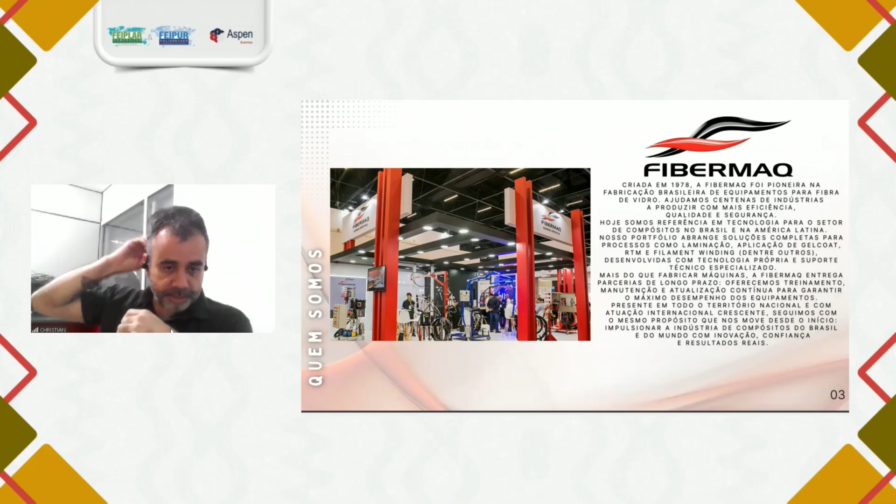Okay, as I said, we were founded in 1978, and we also manufacture equipment for polyurethane, for spray, injected, or pre-molded applications.

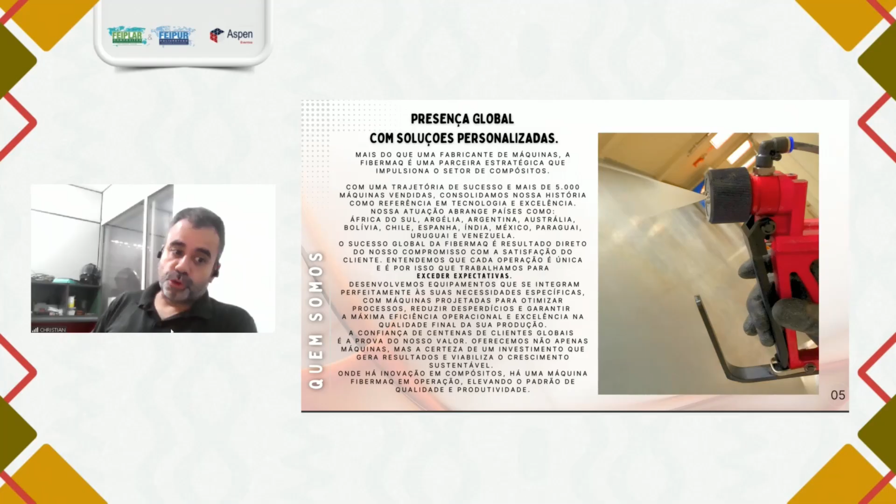We are present, I believe, in all the continents: Europe, Africa, Pacific. And well, I would like to introduce our new line of equipment for the application of F1, for gel coat, spray up, and RTM. So, what is our differential?

We are fit to the Brazilian market. We know labor sometimes is hard to find, and company structure sometimes is not the best. Our objective is producing a simple and functional equipment of easy maintenance, so you don't need anything special or any skilled labor for maintenance. We simplify as much as possible, avoiding any complication, because we know that sometimes companies produce guns and pumps that are too complicated, and then we get to the plant and it is stuck there due to a lack of labor.

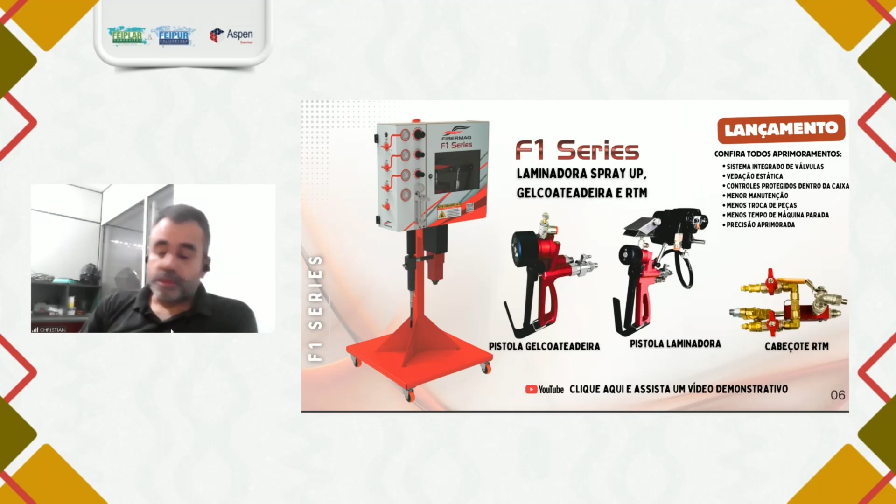It is within a box, which is very nice. You don't have any mobile part exposed, so you cannot put your hand on a pump that is working and get your finger stuck there and get hurt. The equipment there is protected.

We know that spray up and gel coaters create a mist, and with a protected equipment, you protect the fundamental parts of the machine. They are not accessible, so there's no accumulation of dirt. It is enclosed, but with easy visualization and easy control. It is an equipment that is robust and simple.

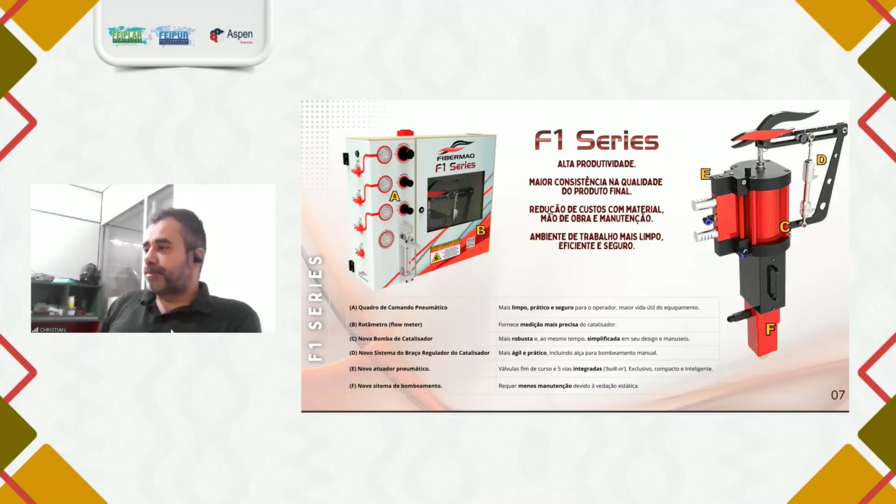Some advantages of this line, as you can see, it's very small, very simple, not many parts, which is our objective. Another line is Evolution, similar but a little older, more traditional in Brazil. This may be the most common equipment in Brazil, and as we have had leadership for many years already, almost 5 decades, with gel coater, laminator, and RTM.

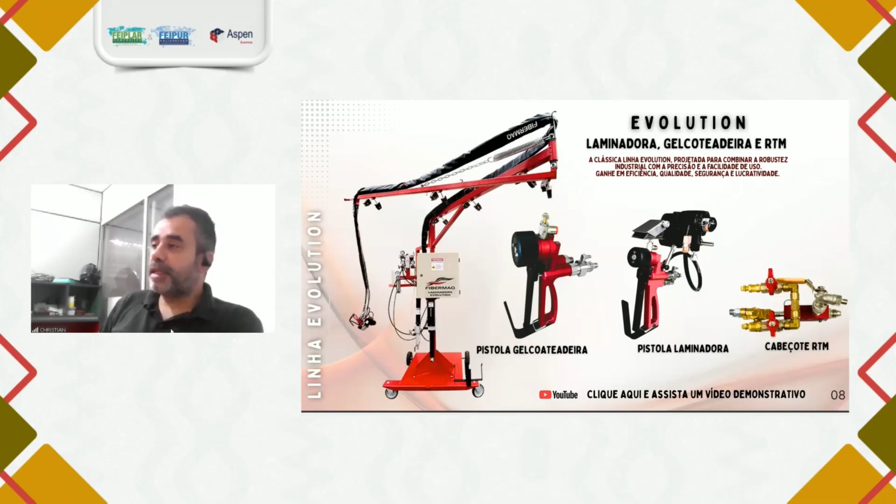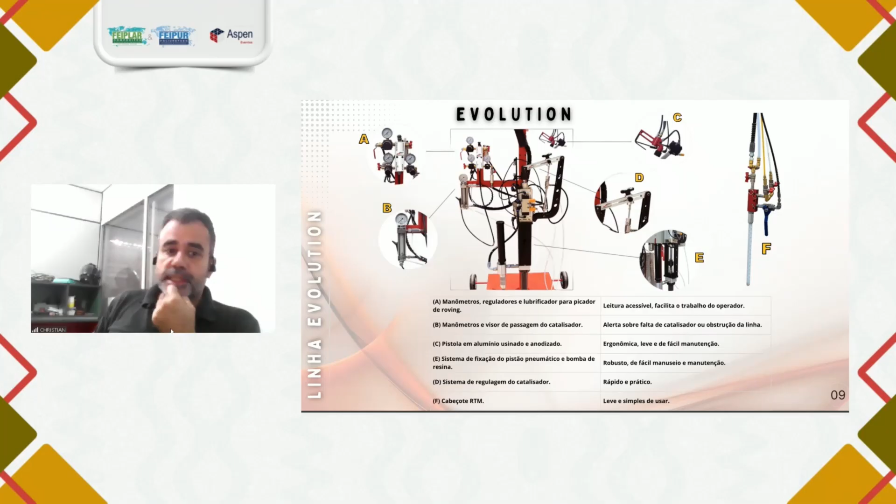Here are some characteristics of the machine. This material is also available in English and Spanish. If you need it, just ask and we can send you this manual.

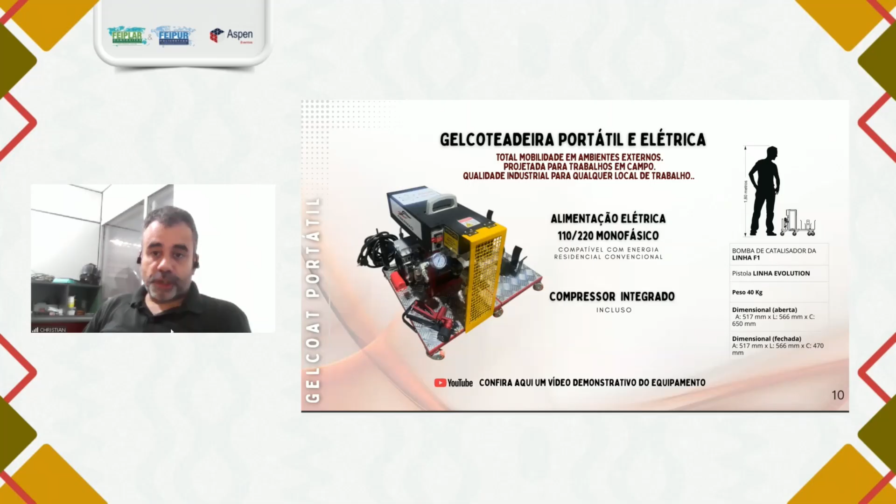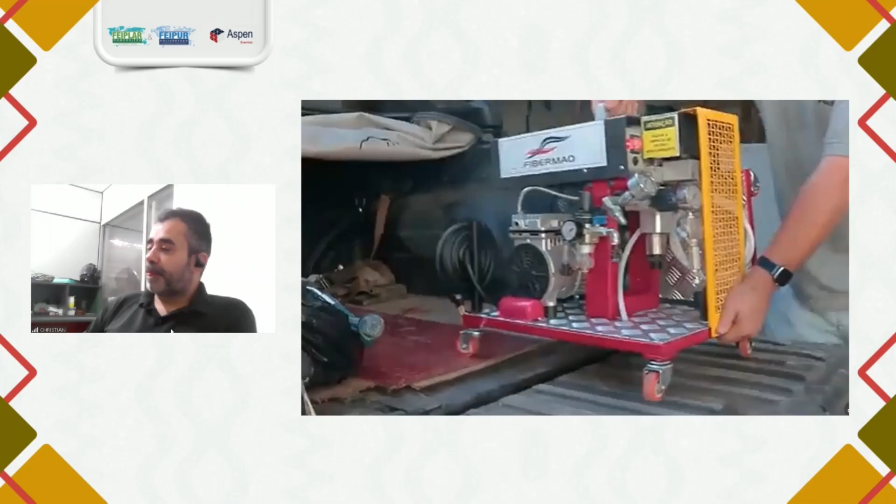This is a very interesting product. It's something new. Actually, we launched it last February. This is a gel coater. Let me show you a video. See the footprint - it's just 40 kilograms, and it can be taken in any car.

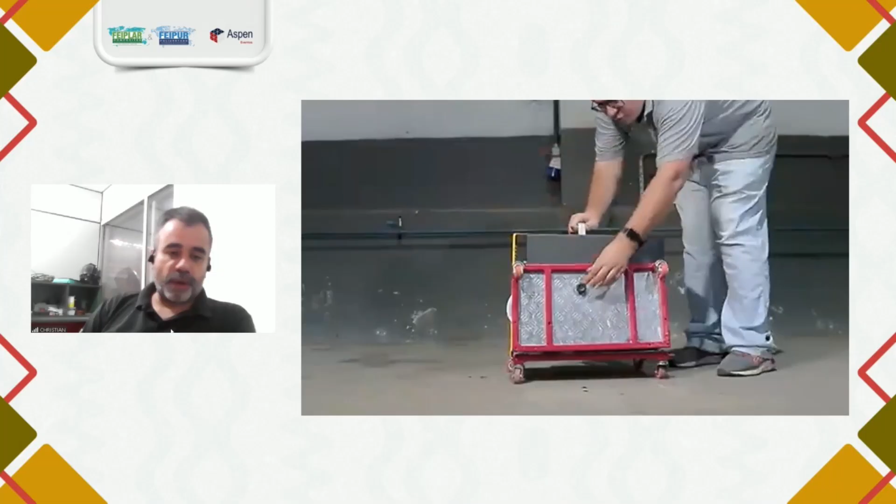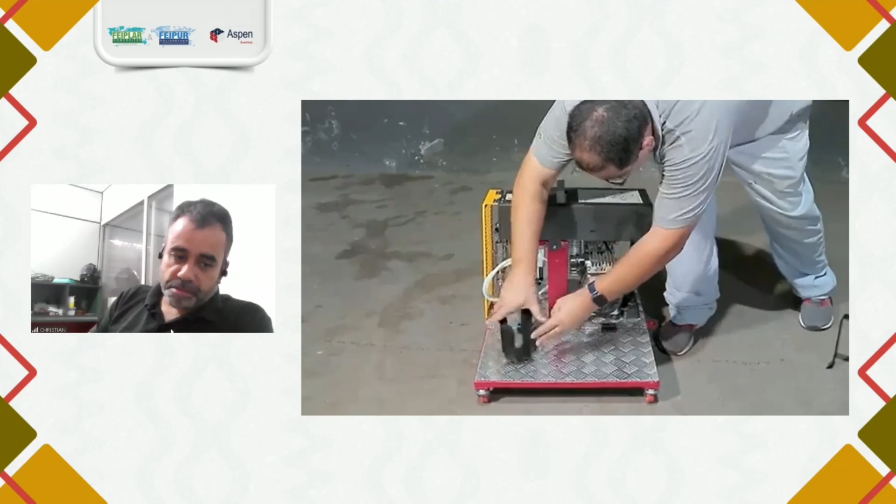In the smaller trunk of the smallest car, it fits. It's electric and mono, so it works at 220 volts in any company or even for domestic use. It's almost a domestic use equipment.

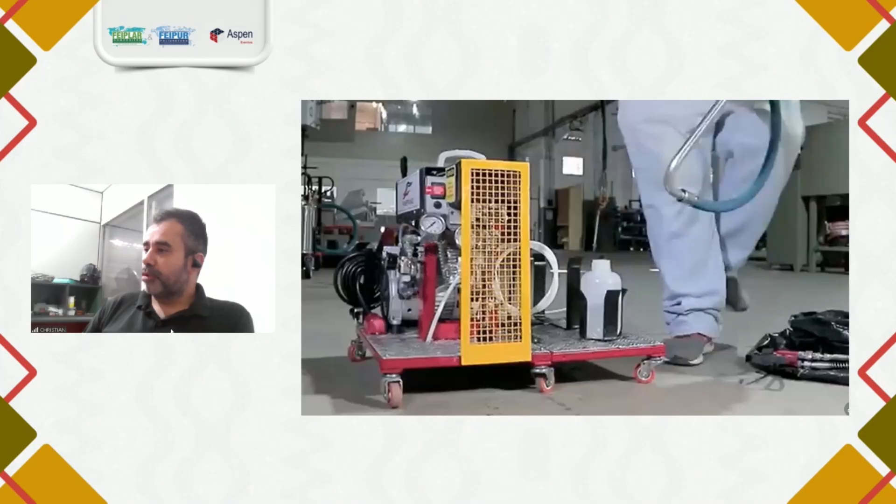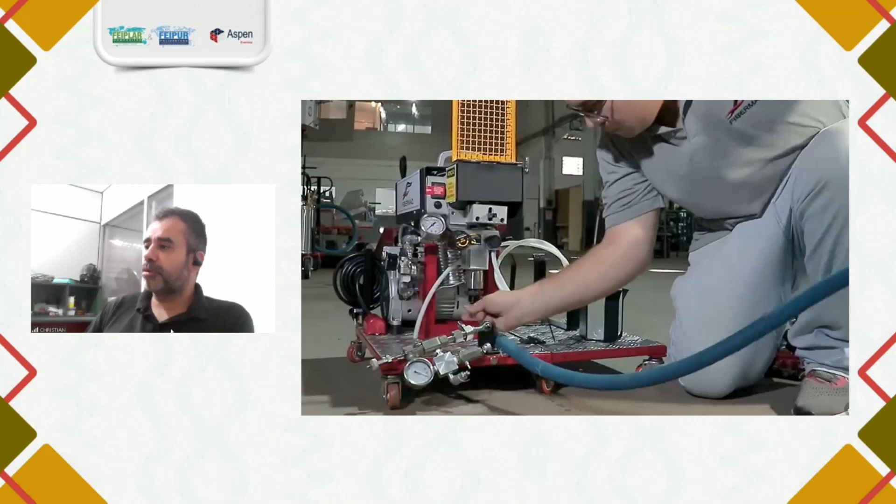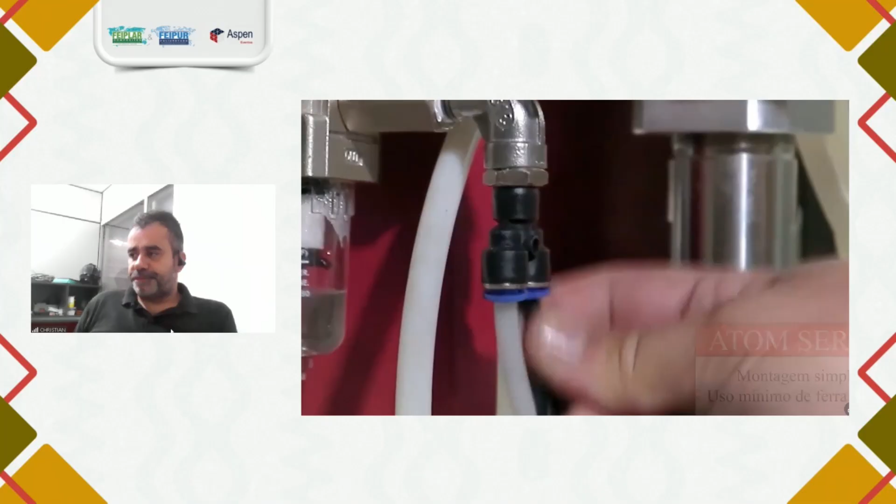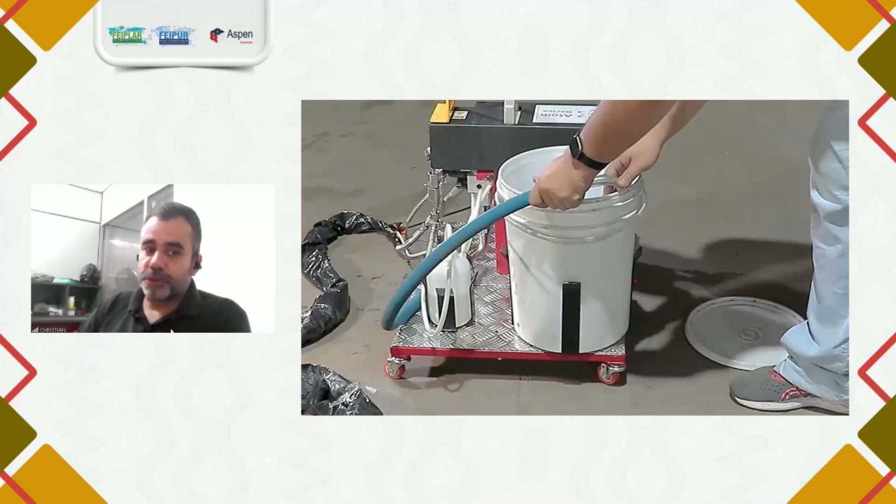Here we assemble the tanks, or the tank support, for the gel coat. This is the pump. Here we are adjusting the percentage we want, 1.5, 2, 3, 3.5. Here I'm connecting the hose, which is the one that will lead the gel to the vessel. It's a fast connection. So, a very compact equipment, easy to take anywhere, easy to use. With just a wrench, it is enough to assemble and disassemble - not for using it, but for maintenance, a simple wrench is all you need.

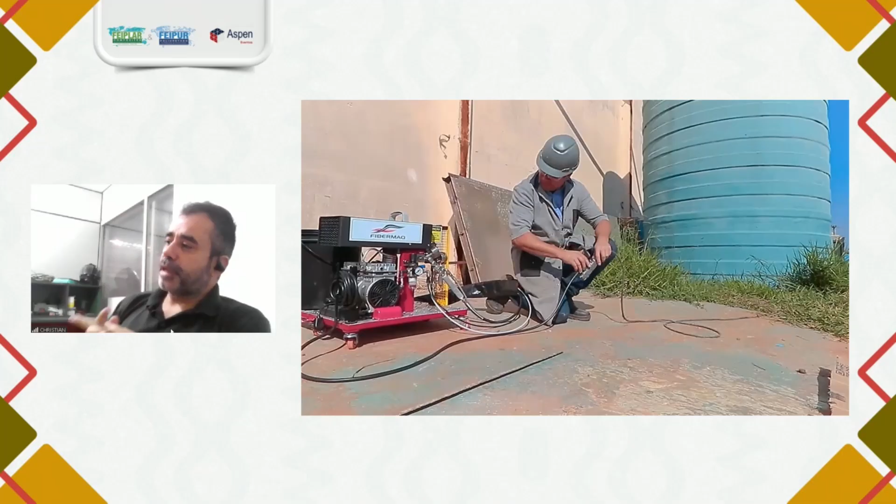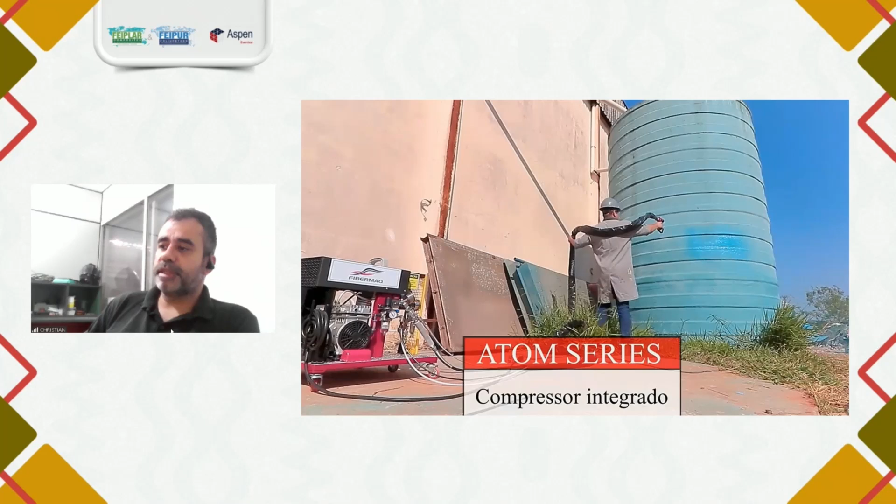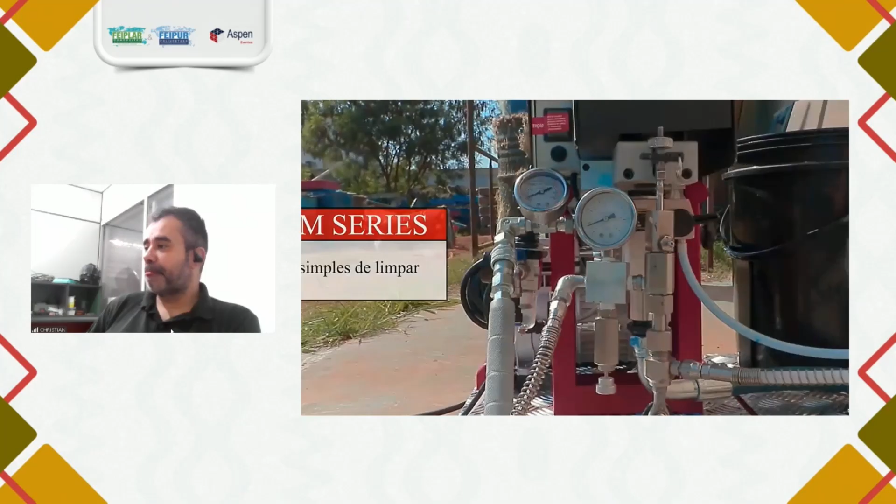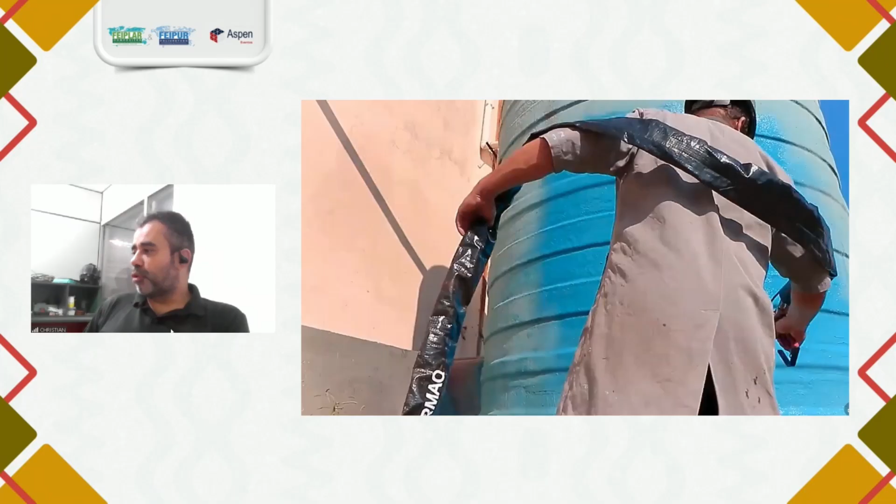And here we see the operation. The pump is electrical, but we need to have compressed air in the gun, so there is a compressor that is fully integrated, with outputs for connections here. You may connect other items on the machine as well. So the MEK pump is working as well, and that's quite professional work. We are talking about a small-sized machine, but the results are quite professional, as you can see.

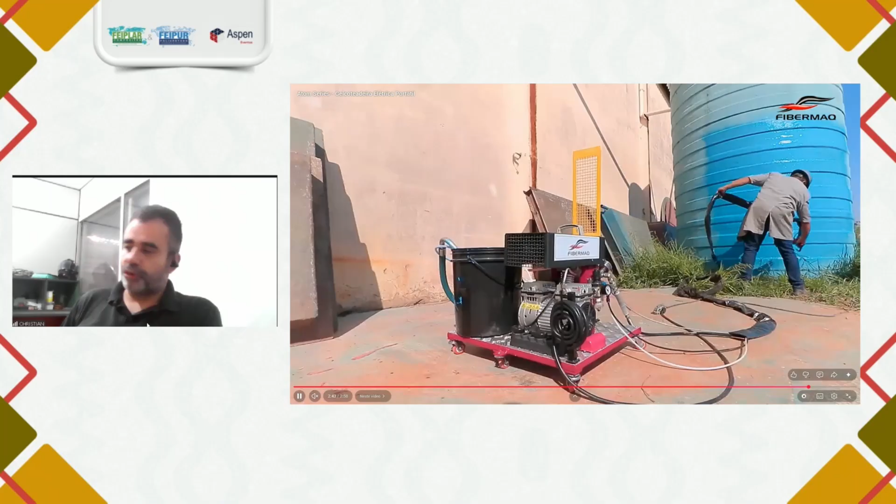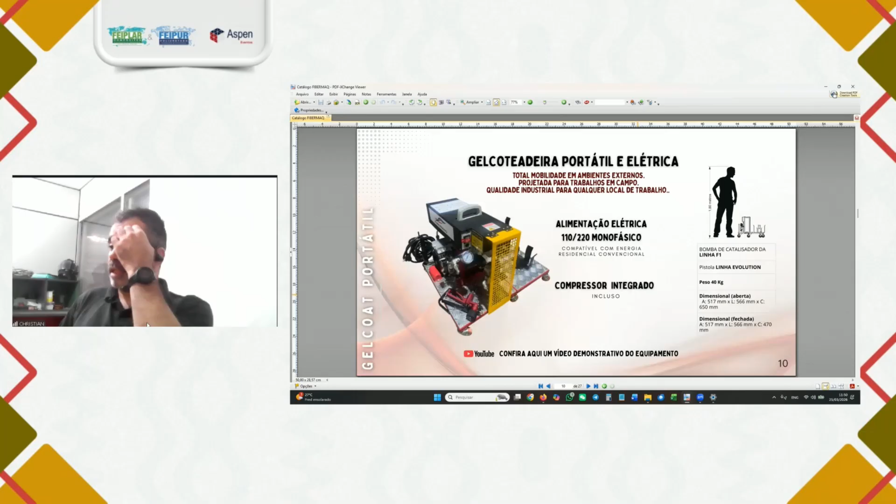High standards results, that's the gel coat painting. We should have a laminator soon that will follow the same design - not ready yet, but it should be ready by late this year. Very nice result, right? So we have the gel reservoir, the catalyst reservoir, and then we do the work, we produce the piece. That's the new equipment, 220 voltage, but it can be 110 as well.

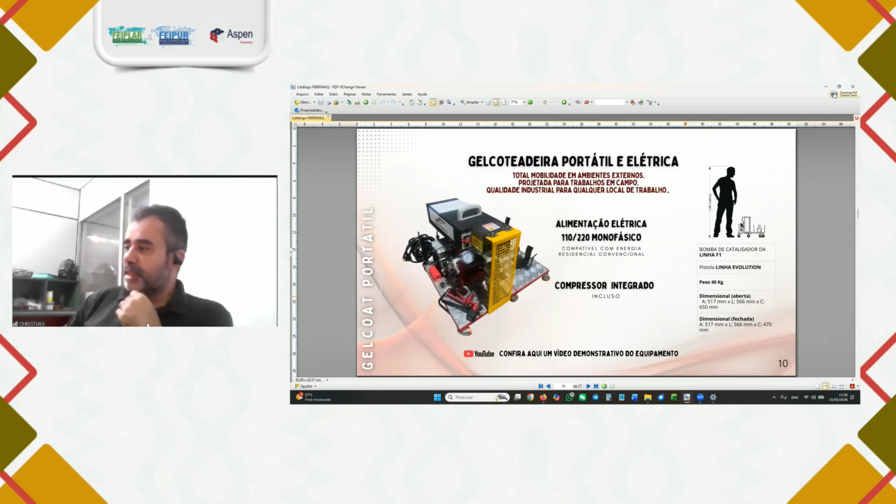So that's a person whose height is 1.8 meters, for reference. We have the measurements here. It's a quite compact device, as you can see. That's a whole different line that we provide.

That's the filament winding solution. In this case, we use it for tanks - they can be up to 15-meter tanks.

Could be even bigger, but it's because of transportation. We cannot produce anything bigger than 15 meters because then transportation may be a hindrance. Diameter-wise, small diameters from 1, 2 inches up to 4, 5, 6 meters in diameter.

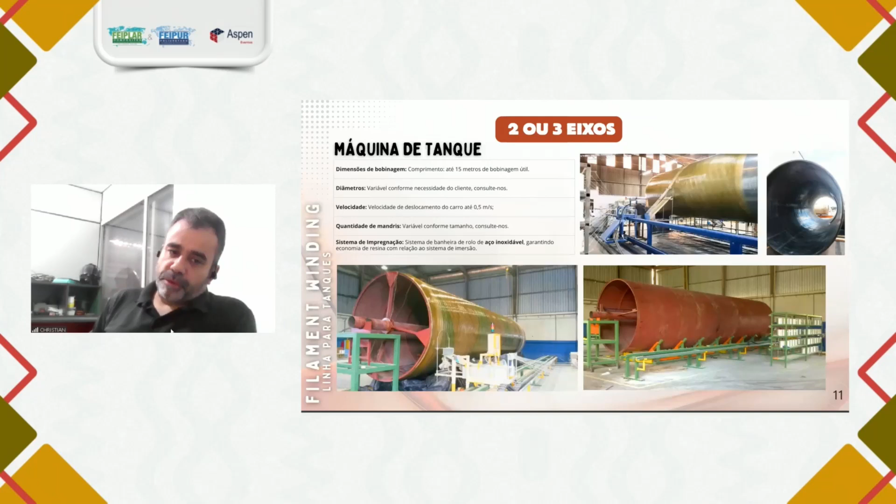So I took some examples of large pieces to show you here in this presentation. So that's the tank machine. Now here's the tube machine, the pipeline machine.

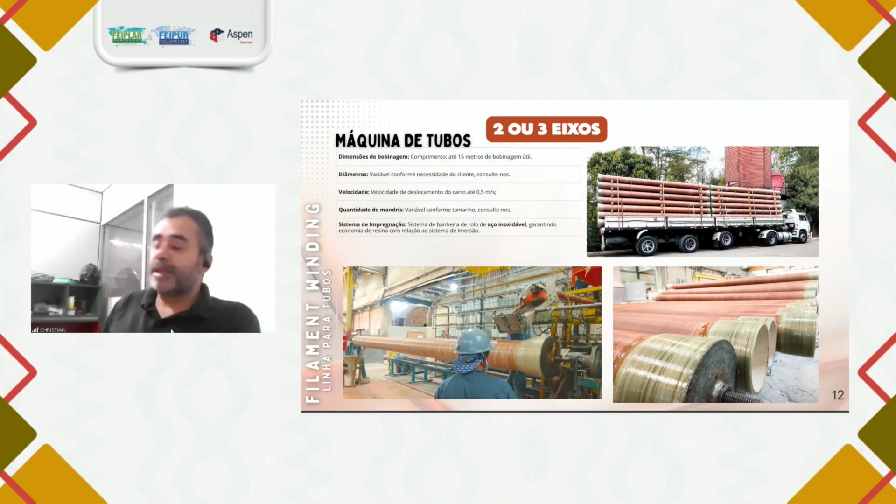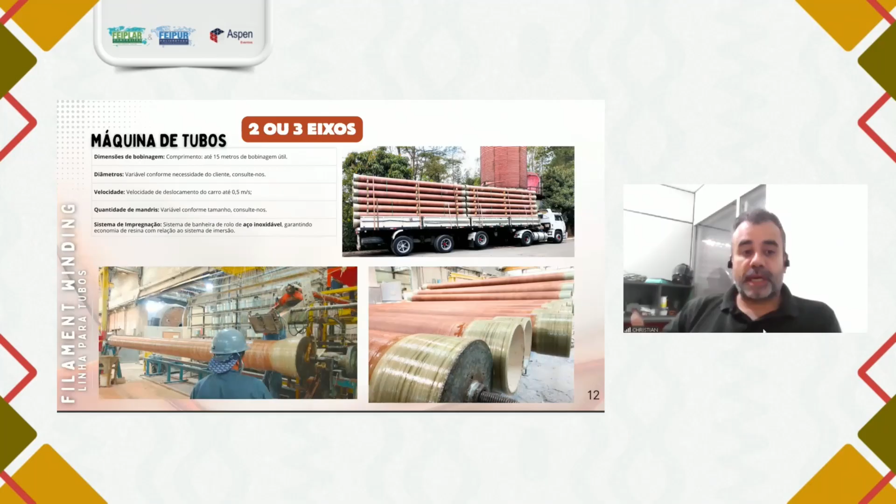From 2 to 3 axes, the standard machine goes up to 600 millimeters in diameter, okay? So you will not manage to work at 50 millimeters, 4-meter length, because then you're going to lose efficiency, so we don't do that. So that's the pipeline machine.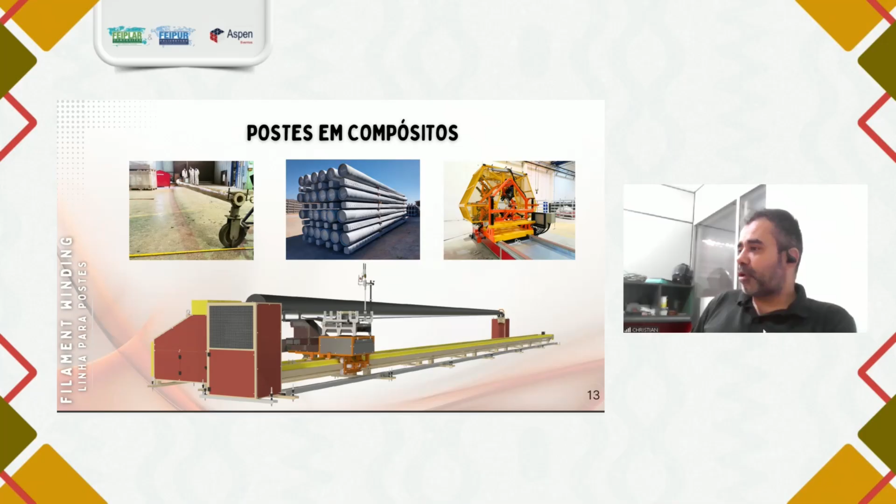Just like Rodrigo was telling us, we have the poles that are made of fiberglass. There are many advantages, and he was telling us about all of this - how light they are, their service life, there are many advantages.

Well, we go up to 15 meters in length, more or less, because even if we can produce longer than that, there is no transportation. 50 to 600 millimeters in diameter. If you need greater diameters, we can find a solution for you as well.

We work with 1 mandrel or 2. One mandrel here, and another one working with 2 mandrels at the same time for 2 poles at the same time, okay? If you have a double machine...

Production increases by 70% when we compare to a single lane machine. Well, you can do 2 at the same time, but when you have 2 chucks, you have the downtime - you unload and reload the machine, and the time taken is longer for the chuck, the mandrel. So if I use 50 threads per chuck, I work with 2 chucks.

So there might be a rupture of a thread. It's twice as high when we compare to a single chuck. And if there is a rupture in a thread, in a filament, we have to stop both lanes of the machine. So that's why we say the increased throughput is by 70%.

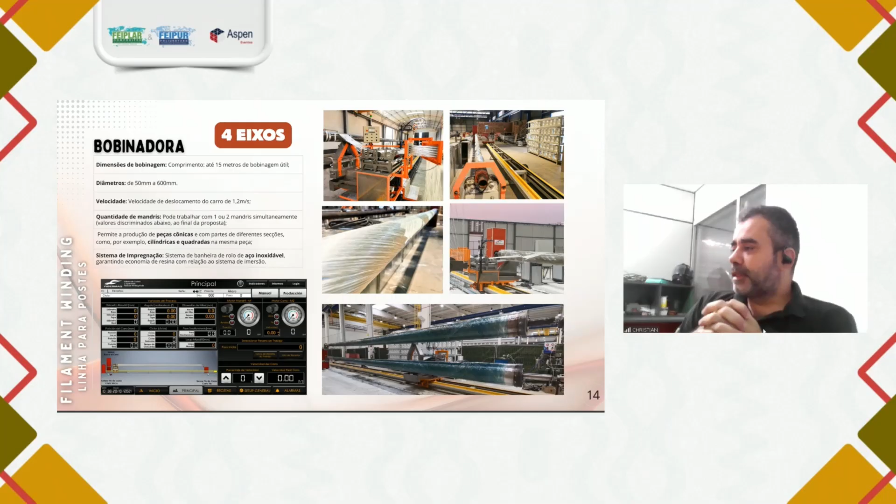So, when you work with a single chuck, a single lane, we recommend actually having 5 different chucks, because you follow a process. You are producing 1 piece, there are 2 pieces in the curing station, another piece that you are releasing from the mold, and then you are preparing a 5th one.

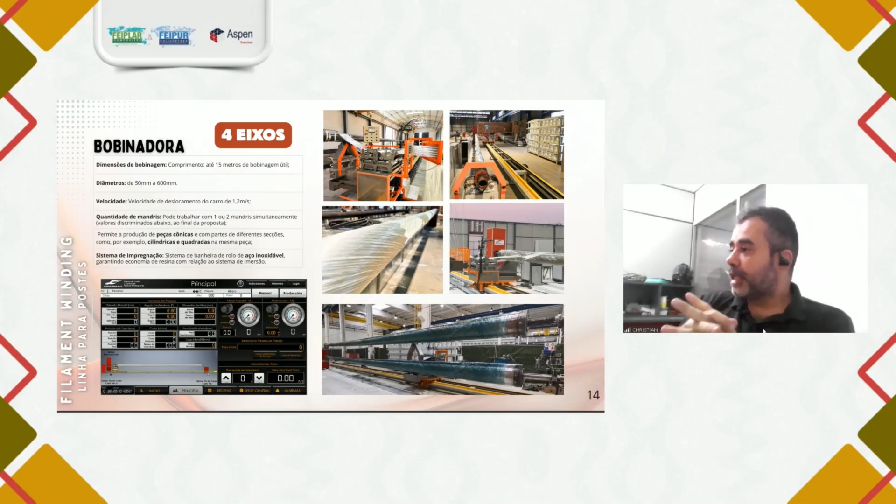So it's a continuous process. You never stop. You go from one stage to another. If you work with 2 chucks, perhaps it's not enough, and you need a higher number of curing stations.

So at least 8 - that's what we recommend, having 8 chucks. We recommend 5 chucks if you want a single production lane, and 8 to 10 chucks if you want to increase your production by 70%. So then you have 2 lanes, 2 production lines, okay?

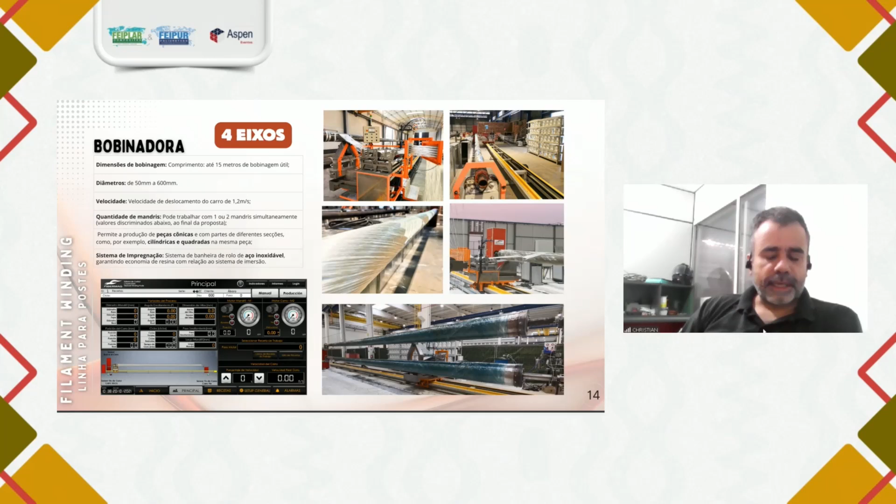Well, it depends on what you prefer. There are people who prefer working with a single chuck, people who want to work with 2 chucks. It depends on the processing speed of your company. They're both valid - I mean, single line or double line.

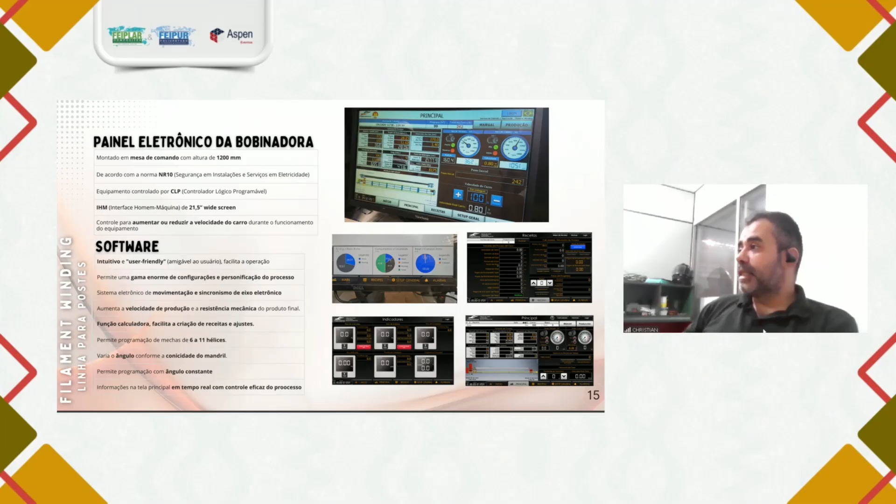That's the panel. I showed the image to you. Super easy to visualize the dashboard and see what's happening. I'm going to zoom in here. It's very much graphical and visual. As the machine moves, you see the movements.

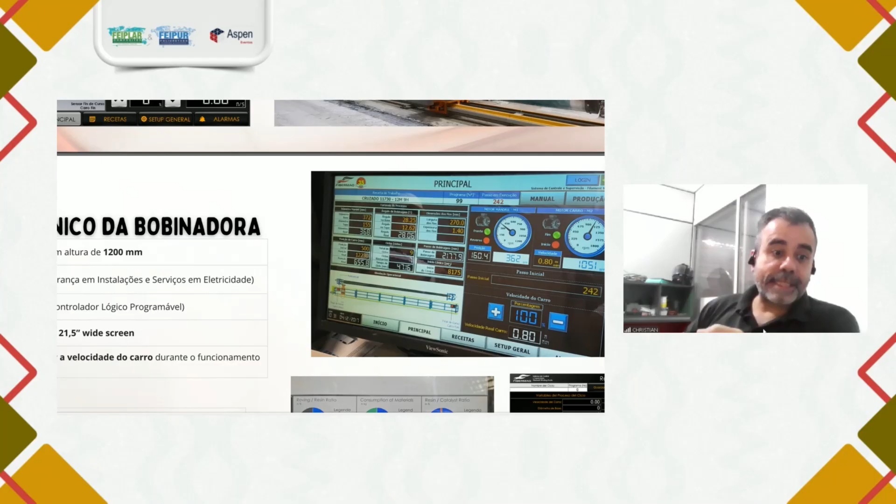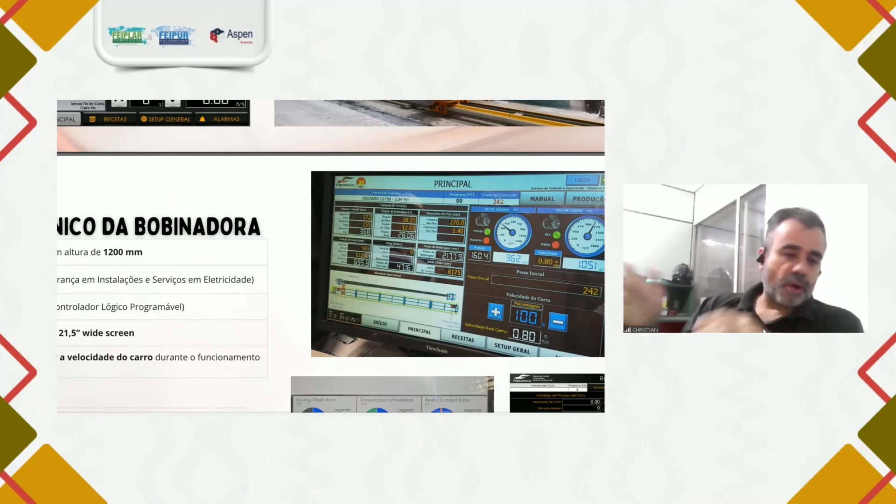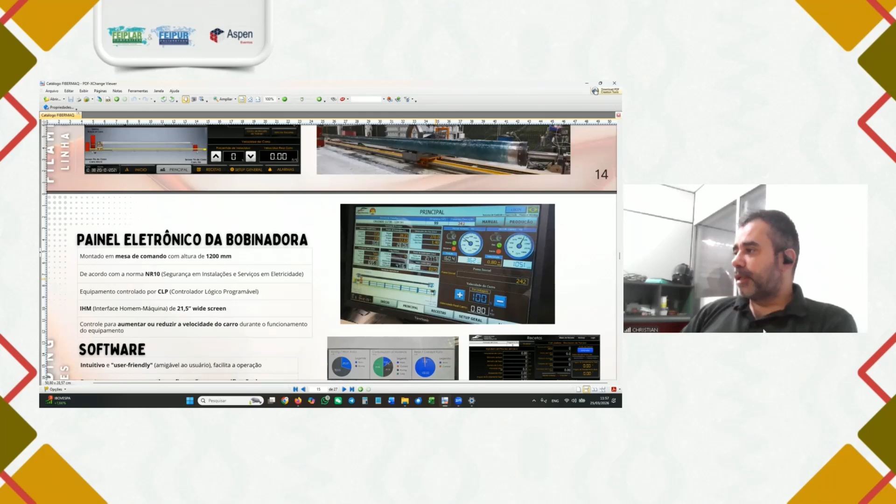Data in yellow, that's the recipe, the preset data for the production batch. So you go there, you introduce the data for the batch, let's say 5% deflection rate, and then you provide all of the measurements and the allowable deformation, and then you generate the steps of the process, and the system will execute all of the steps that you have programmed into the dashboard.

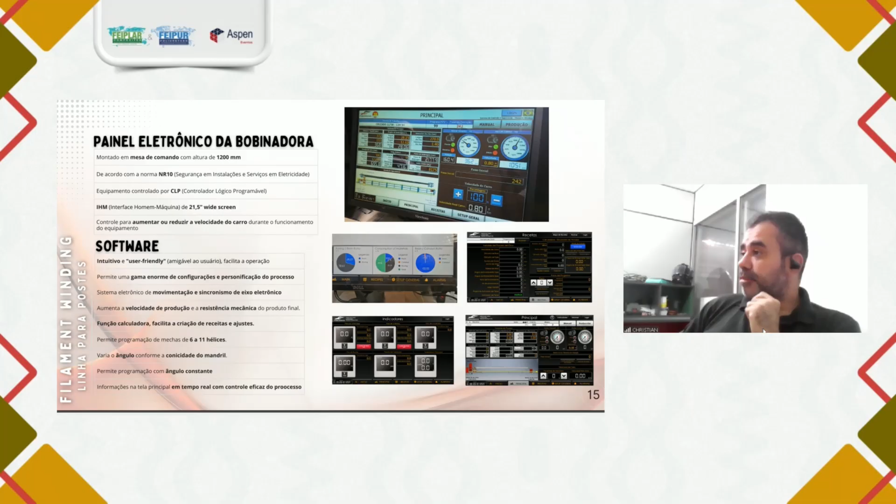It's quite simple. We want to avoid human error. Something that is quite interesting, and Rodrigo was talking about automation.

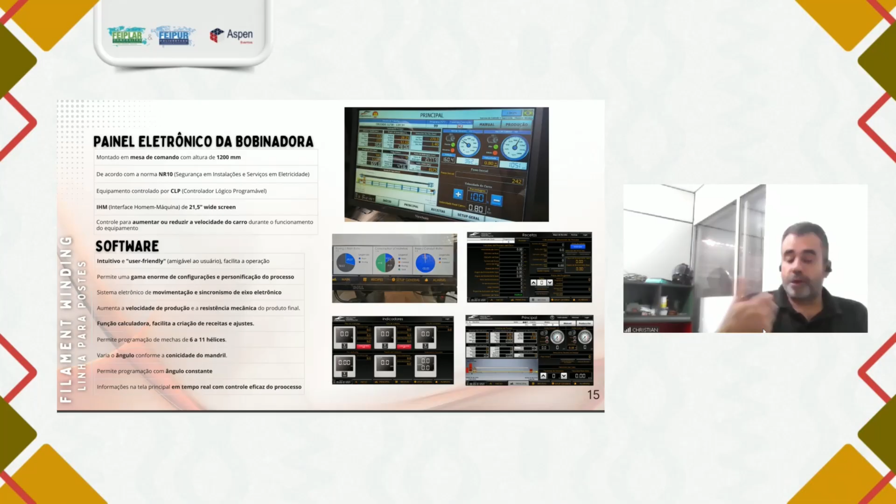Yeah, we have the scales, and the scales are connected to the CLP. So whenever a pole is being produced, there is a report that is issued - start time, end time, operator in charge, percentage of fiber, percentage of resin, and the percentage of catalyst. That's what you see on this screen here. So these are the images of a certain screen.

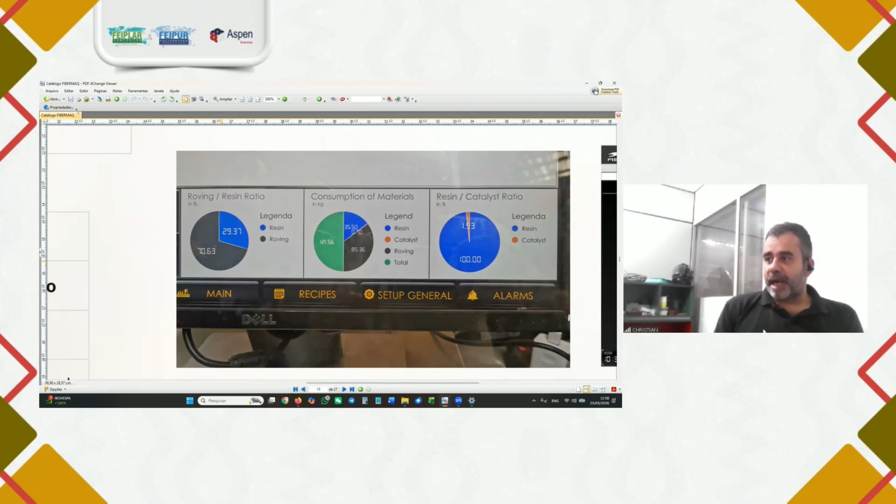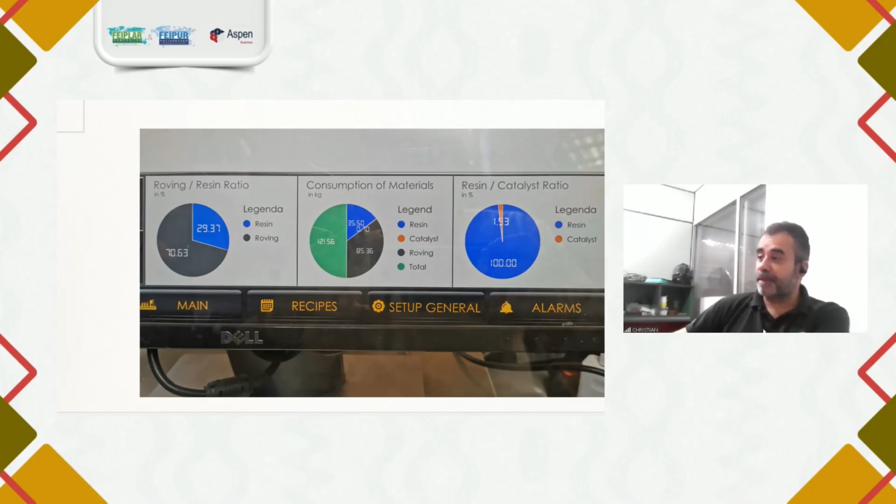So we were able to exceed expectations, actually producing with more than 70% fiber. Acceptable levels in daily production should be about 65-35 up to 70-30. 70-30 is quite difficult to attain, and it can look dry, but it's considered ideal.

We have the formulations, the indicator screen. It's a dashboard that's quite easy to use, and we want to avoid operational errors. You can do the programming on the machine itself, so you do the scheduling, the programming, and then you just call them up. You have the pre-formulations set, you select them, okay? Tech package.

I didn't talk about the scale, the weight measurement. In this case, you register the initial weight of the fiber, catalyst, and resin, and then you compare with the final result. So it compares, and then you have the exact weight of each component in the end.

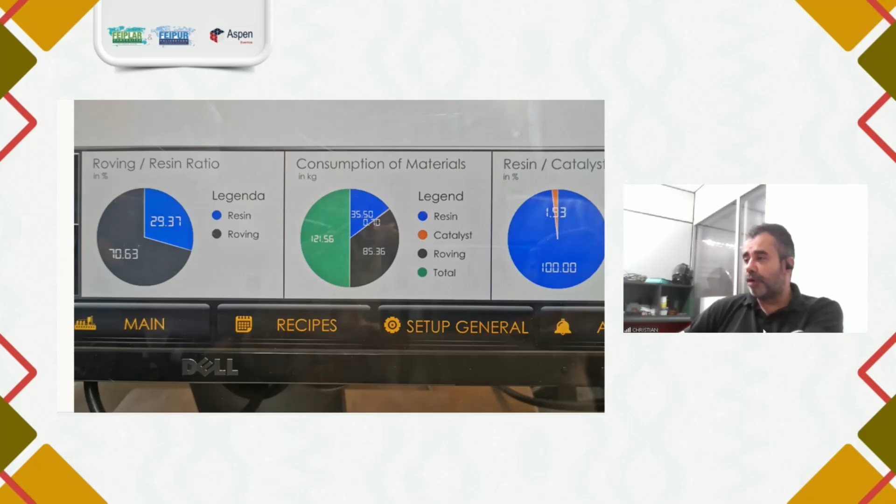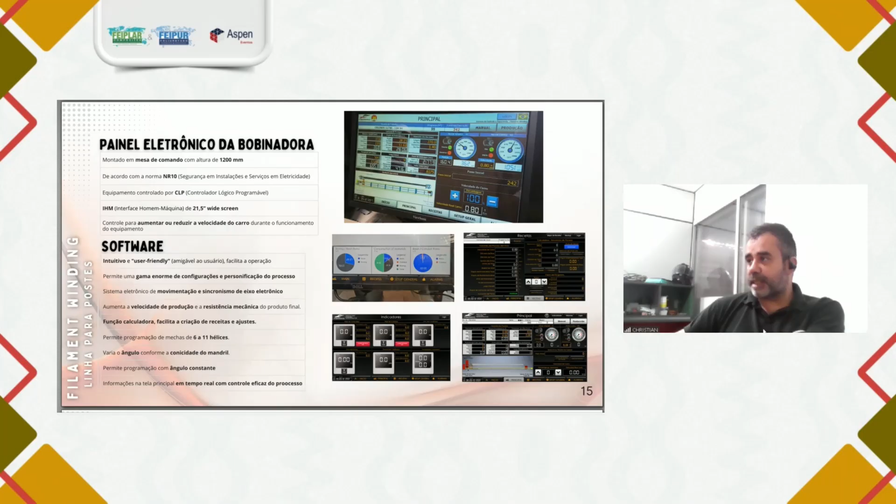121 kilos, a roving resin, a little bit of catalyst. As you can see here, the percentage of resin and catalyst is shown in percentage terms as well. When a pole is fully manufactured, this screen is updated, so you see the results of that pole you have just manufactured. And it also works for tanks and pipes.

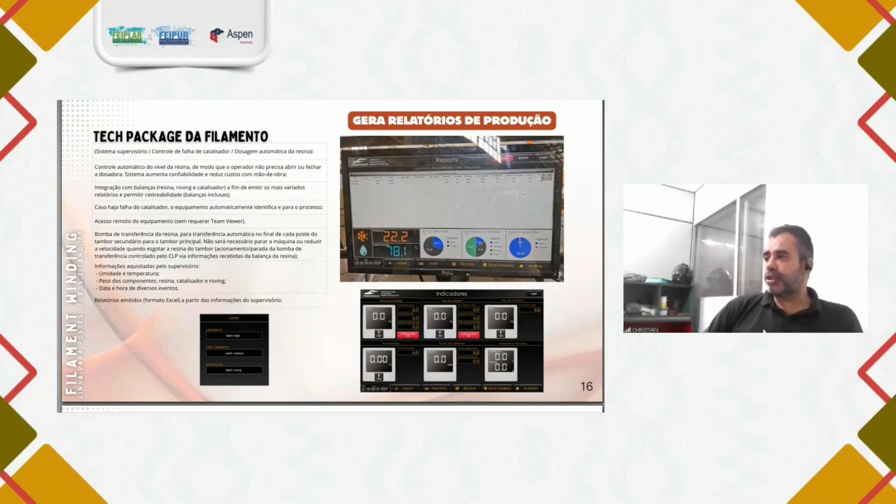So the tech package of the filament. We have the scale for the resin, the scale for the catalyst, and the scale for the roving. In the case of roving, I'm going to multiply by the number of boxes.

So we see a transfer pump. Whenever we finish a part, the pump will be turned on, and this drum, we call it primary drum, it's going to be filled in. That is the drum that supplies the resin to the dosing system. The resin is automatically dosed in this system.

We don't want the resin in the drum to come to an end midway through production. Let's say you are undergoing production and the resin runs out in the drum, so you have to use a tube and replace the drum. This may affect production. You may have to reduce the speed of the machine because of such drum replacement, and somebody has to stop the process to do the drum replacement.

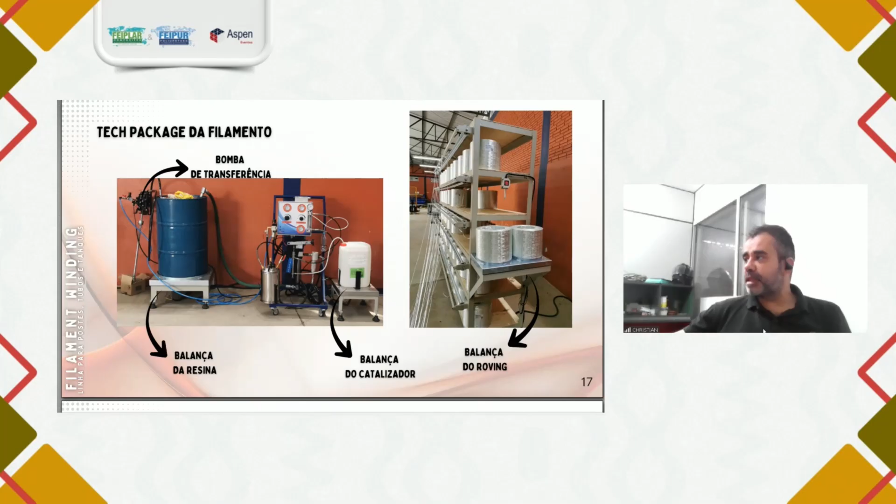When you remove one drum and place the tube into another, there may be air entrapment, so the pump is operating but there is no product, just air. That shouldn't happen. In the process we have, the resin will never come to an end midway through production, because if the resin ends, the pump is enabled automatically and it fills in the tube. So you never have to stop your process—there's no rushing around or facing issues midway through production. We really notice that this process helps a lot.

Some details of the dosing machine: it's a resin dosing system. We have the catalyst dosing system, and we have the scale system to measure the weight. So everything is fed from the drum.

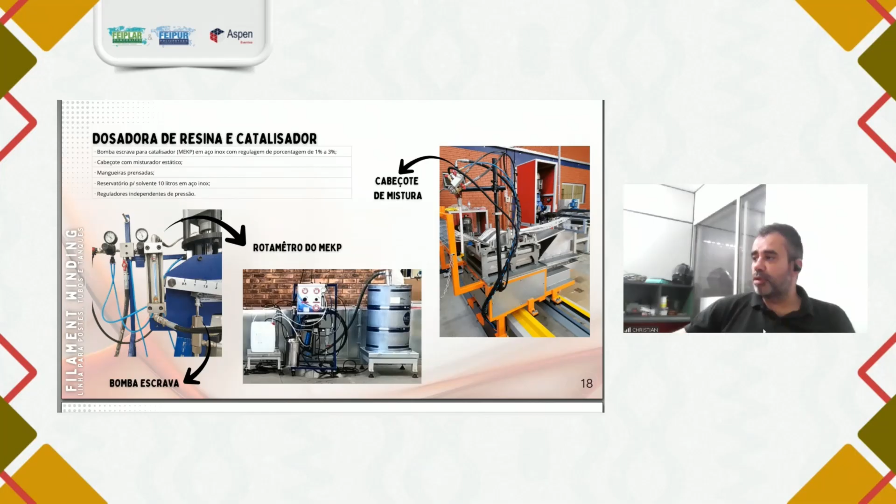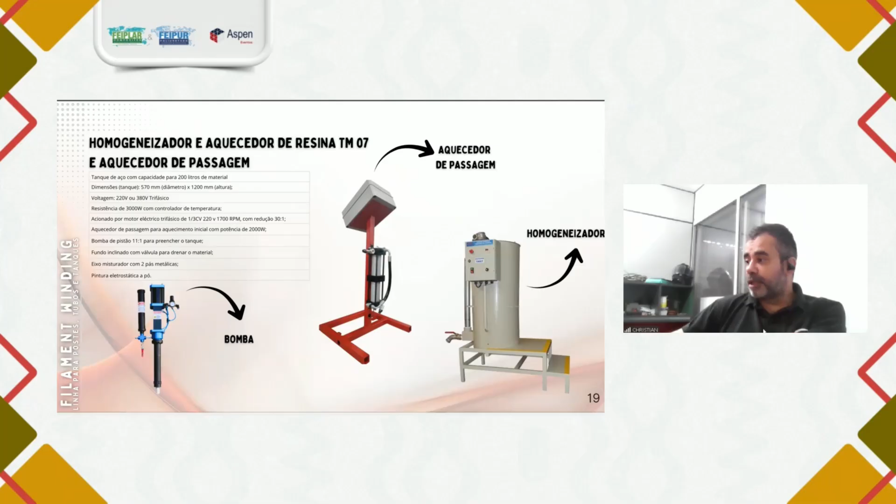This facility here is in South Africa. We have the header here, and in the header we mix both the resin and the catalyst. This is quite interesting as well, because we can keep a uniform temperature of the resin throughout the process.

I have to admit I'm not so familiar with the African continent. I know it may be hot, high temperatures, but I don't know exactly the different temperatures in the different zones of the African continent. I don't know if you would need a heater everywhere, but it's important to keep a uniform temperature throughout the process, because ideally we should adjust the flow rate of the resin and the mix flow rate and never touch this, as we could incur variations that would result in variations on the parts. We don't want to see that happening—we want an even, very uniform result.

So this has to do with the automated process that Rodrigo was talking about. We have this pump here, and it takes the material from a cold drum. Let's say it's 7 a.m., temperature is low, so the pump is going to uptake the material, and then it goes through the passage heater, where you increase the temperature by 10 degrees C, and it goes to the homogenizing tank.

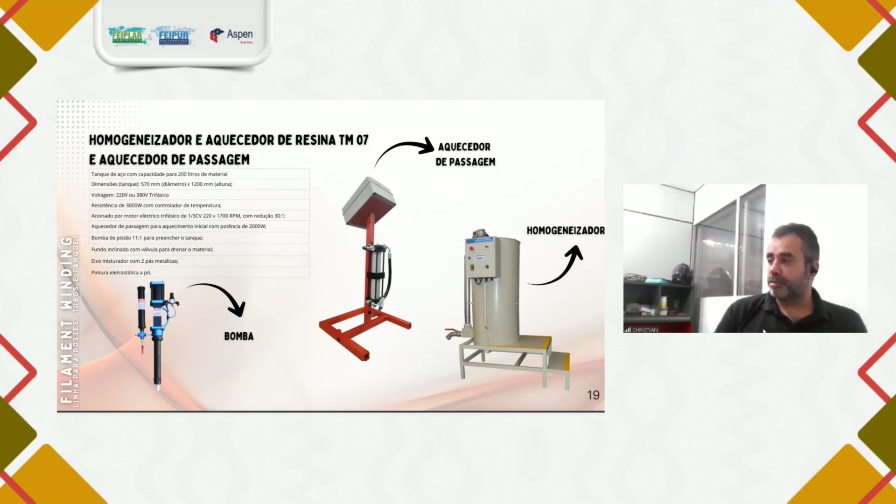The homogenizing tank will keep up the temperature at the same level, and it's going to keep the homogeneity of the fillers within the mix, because you may have fillers in the resin and different additives, like anti-flammability additives. In the case of gel coat, you have the UV protection, so everything is pre-homogenized. That's why we have the homogenizing tank.

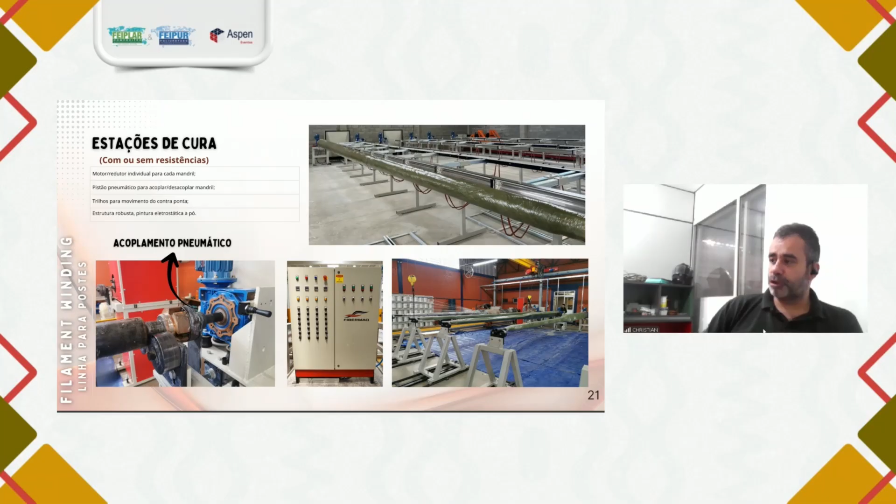We also manufacture the chuck, which is used for poles and tubes. And the curing stations, that's the next step within the same process. So it comes from the machine, it goes into the curing station. Cure is going to happen so that you can release the product. The next step is the releasing step.

In this case, you have two hydraulic pistons. The pistons will push the part from the chuck, pushing it out. We are talking about 50 tons of force, so it's a quite robust piece of equipment.

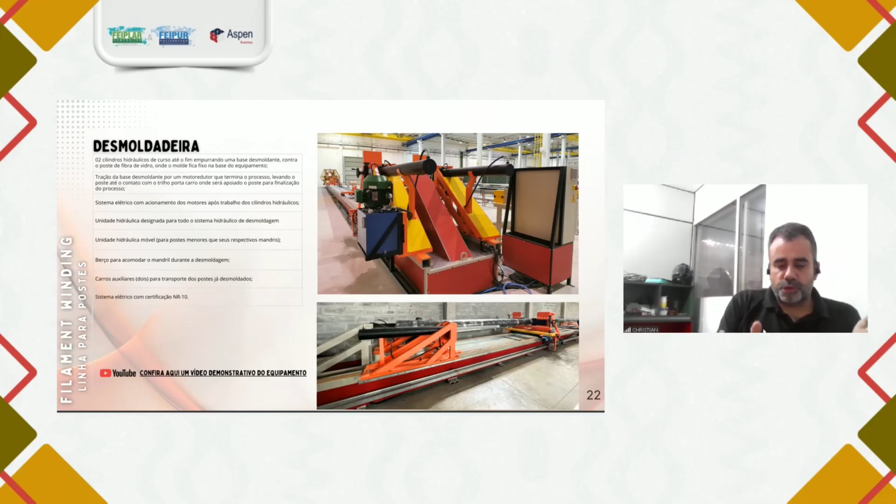And once the hydraulic pistons do the initial work, we then have the electrical motors to deliver the pole. It's a tapered piece, so as soon as you push forward like 200 millimeters, then you will have enough force to continue to release them.

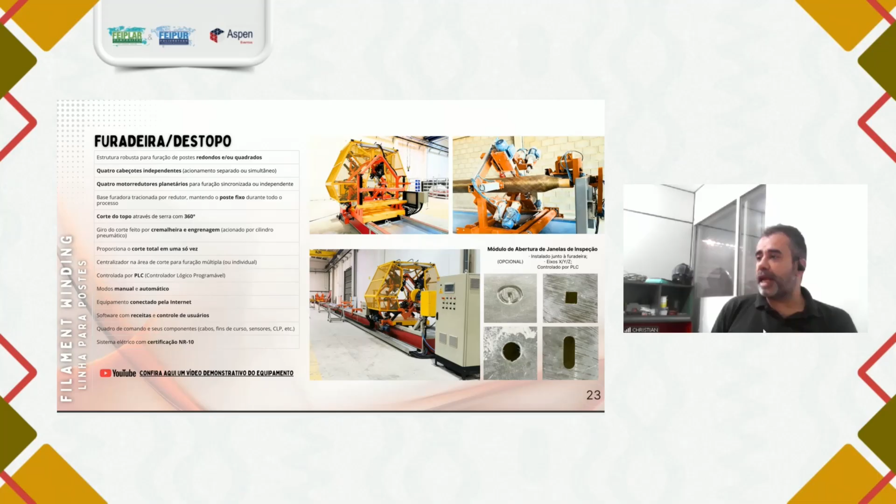Then the driller, we may have drilling areas, so we have to put the crossarms in the case of poles. We have a CNC, with X, Y, and Z axes, so that you can open windows. Sometimes they're inspection windows, or you have drilling to make the holes. So this is all contemplated in our project.

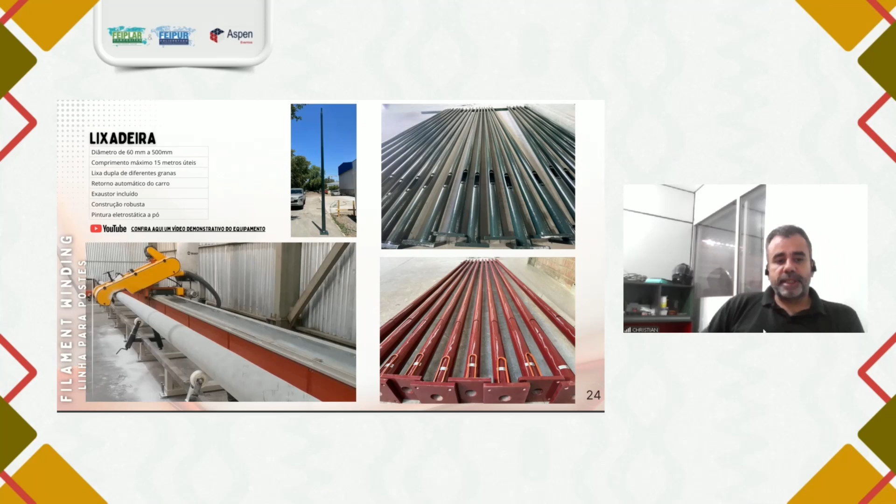And the sanding machine—at least in the Brazilian market, and it happens in South America as well—for the lighting poles, they have to be sanded so that the outer finish is of high standard, a finish that is closer to that of steel. So they were sanded, filed, better saying sanded. The inspection windows that were cut by the equipment were part of the process.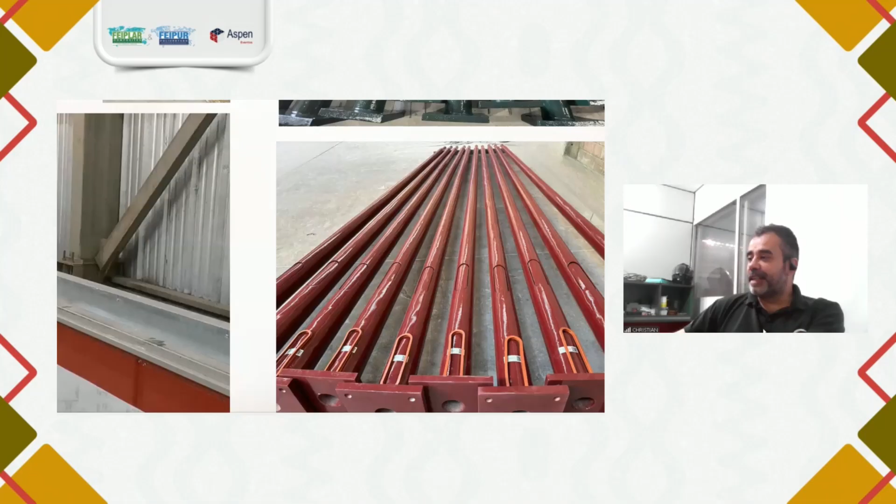They were cut and painted. And then there is a cutting station for the cutting of the windows, the inspection windows that you see here. So these poles are ready.

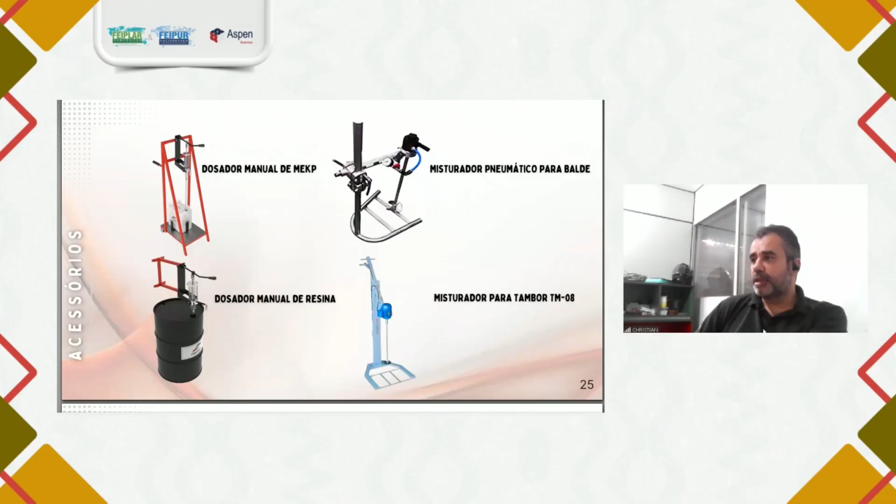So we also add the caps on the inspection windows. We use the trims to produce the caps for the inspection windows.

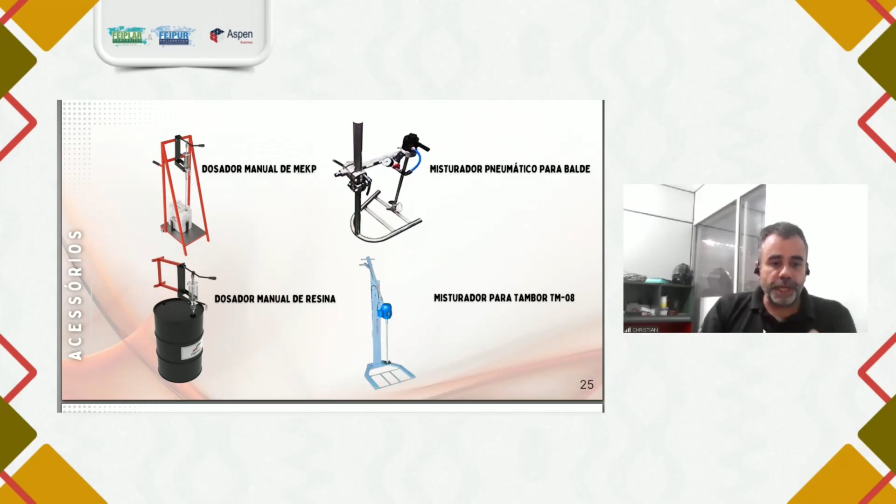Here we have the dosing system. Let's say you have a manual production, and you need half a kilo of resin or half a kilo of MEKP. You can do that. MEKP is quite dangerous, so you shouldn't be working with bottles, gallons, or funnels. It's a quite simple dosing system.

This can be used in different types of plants that work with composites. We have the mixers as well that we can offer you, and these are some of the companies to whom we have provided services and materials.

For different companies, we produced equipment to be used with polyurethane, pole manufacturers, filter manufacturers as well, and companies that produce accessories and vehicle accessories.

We've had partnership programs with Owens Corning, a fiberglass manufacturer. That's the most widely known, Owens Corning. They really stand out because of their history, right? Great company.